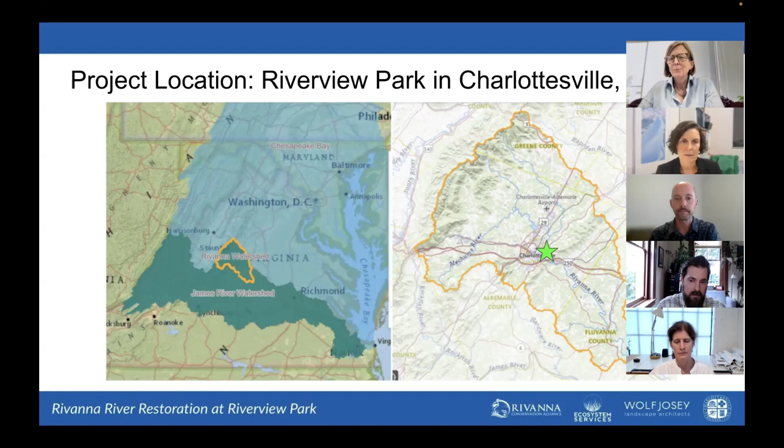So this project really got its start with a conversation that Kip Mumaw and I had many years ago, back in 2019, standing in Darden Towe Park. We were looking across the river at this area that was covered in riprap. What had happened is that the riverbank had eroded significantly and exposed the sewer line that runs through there. The sewer line also runs through Riverview Park. We were trying to figure out how to get ahead of issues like this so we don't end up having a riverbank that's completely covered in riprap, which is not what anybody wants, I don't think.

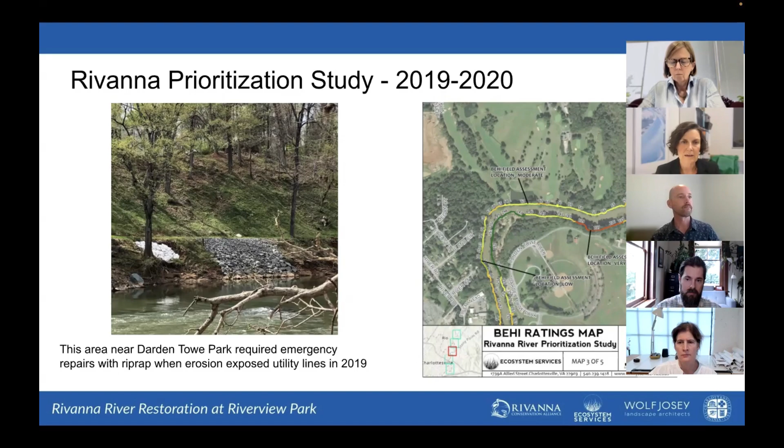So we were able to obtain a small planning grant from the National Fish and Wildlife Foundation to predict erosion rates in a 5-mile section of the Rivanna River running along Charlottesville, and use that information and other data to prioritize places where riverbank restoration was needed and feasible. Coming out of that project, we selected a location where we wanted to pursue a project.

So we selected Riverview Park, and we selected it for quite a few reasons. Primarily because it will generate so many important benefits for our environment and our community, and also has the likelihood—and we've seen this come true—of bringing together a lot of partners and funders who are really interested in making this project happen.

So the main benefits coming out of this project—we'll go into all of these more later in the presentation—but in a nutshell, the project will be protecting the land, trees, and trails in the park from erosion. We're seeing all of those things falling away, washing away every time we have a big storm. Riverview Park isn't a huge place, so we can't afford to lose it, and we don't want to be in a situation where that erosion continues unchecked into the future.

The project will reduce a lot of water pollution, and Dan will go over some numbers with you. It will improve a lot of opportunities for recreation—boating, wading, observing wildlife. I saw in the poll that was one of the things people said they like to do the most, is come to see nature in the park. And it will enhance habitat for the other creatures that like to use the park and live in the river and need a high quality environment.

The project will also protect public safety. Right now, the banks are very steep and dangerous for people. And it'll protect existing infrastructure. Like I mentioned, the main sewer line for the city runs down along the river through the park here, and we don't want it to be exposed through erosion.

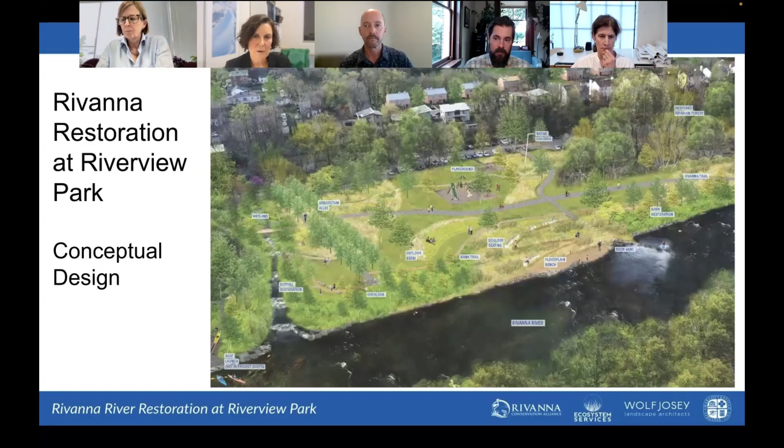Last, I'll talk about project funding. Since we submitted our first grant proposal to start implementation a few years back, the cost of the project has escalated due to inflation and rising construction costs, not because of anything we're doing with the project. Right now we estimate the total cost for everything, design, permitting, and construction, to be around $1.4 million. We obtained a large implementation grant from the National Fish and Wildlife Foundation again to get us started, and the city has also contributed funding from the Stormwater Utility Fund, which is, I think, $250,000, a large amount of money.

The Office of Sustainability and the Department of Parks and Rec are also contributing. We have a nice large grant from the Virginia Stormwater Local Assistance Fund and from the Anne and Jean Worrell Foundation. We also have funding from Rivanna Water and Sewer Authority, some from the Rivanna Trails Foundation, and RCA. So we have a nice collection of funders working to make this project happen.

And now I think I'll kick it off to Dan to talk about water resources.

Thanks, Lisa. Before I jump into my presentation, I want to take a minute to say how thankful I am to be working with RCA on this project. We've been partnering on projects for over 20 years now and had the chance to work on a lot of impactful projects together, but I think this one is really the most exciting and significant yet. It simply wouldn't be happening without the countless hours of hard work that Lisa and the staff at RCA have put in, and the resources they're bringing to this project. So on behalf of the city and really the entire community, thank you, RCA, for helping us make this project happen.

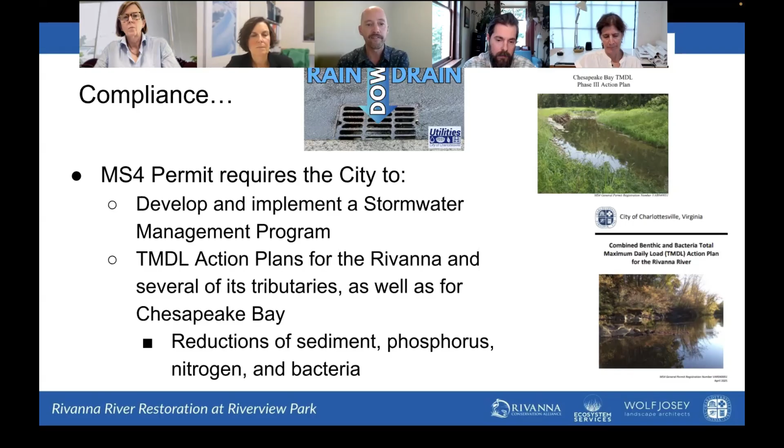The permit also calls for the development of action plans for these impaired waters, specifying ways in which we are going to reduce pollution in those streams and hopefully restore them to a healthy state. We have action plans for all of those waterways I mentioned, as well as for the Chesapeake Bay, since Charlottesville falls within the Chesapeake Bay watershed. Specifically, we're talking about reductions of the pollutants sediment, phosphorus, nitrogen, and bacteria.

These projects all have quantifiable pollutant reductions associated with them. And that brings us to this project, the Rivanna Restoration at Riverview Park, which will continue to provide us some of those pollutant reductions we need in order to meet our MS4 permit requirements. So I just wanted to give a little bit of a feel for what our requirements are and the impact this project will make towards meeting them.

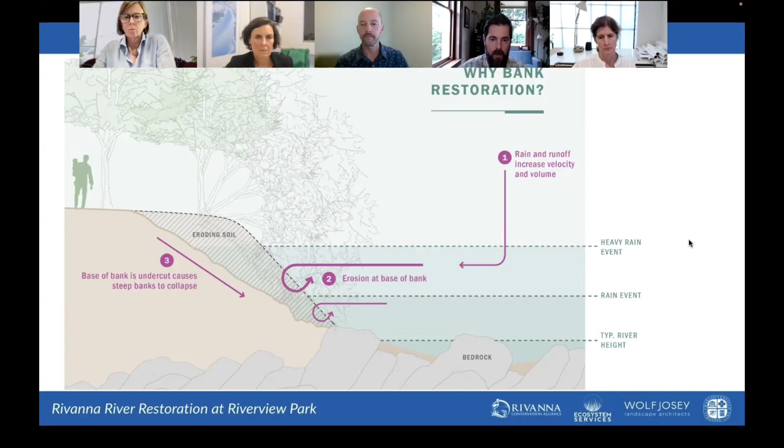We're seeing this process take place even over the period of assessment. So we want to look at what is creating the situation and how we might be able to intervene in a way that accomplishes the goals of the project. You can go ahead to the next slide. And of course, we need to look at the riverscape in its context.

I like this quote from Ellen Wohl — she's a researcher out of Colorado State University. The quote is, 'Rivers exist in a rich and complicated context that reflects fluxes of matter and energy between the river and the greater environment, as well as the history of these fluxes.'

I like this because it really speaks to the need to look at not just the specific stream or river bank, but we need to look at the watershed, and then we also need to look at the history of the watershed and how things have changed over time. Go to the next slide.

Pre-1937, we would have expected to see a lot of agriculture and forestry activity, logging activity in the watershed. And that can have impacts downstream.

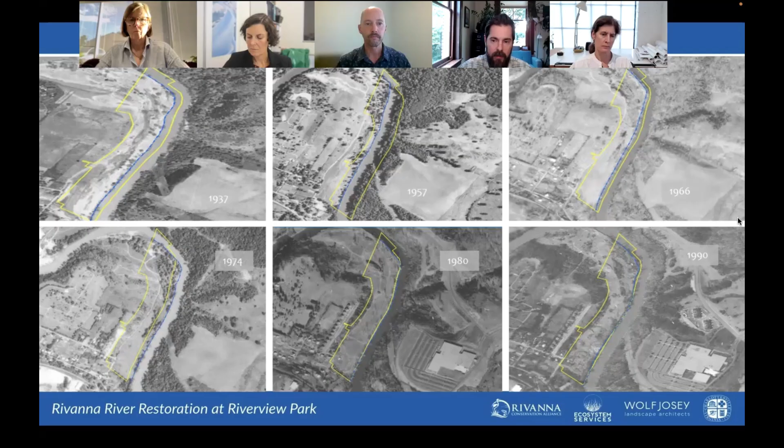Go to the next slide. What we're trying to do is look at what sort of changes, how is the river adjusting to these watershed changes and the changes within the corridor.

We see this - it's not consistent. This is representative, but there are areas that erode more, and areas that erode less through this corridor. We can go to the next slide.

The downstream portion of Riverview Park, some of you may have seen a stormwater outfall. We wanted to look at that too, because we see that it is eroding considerably. You can see in 2017, it was more of a swale.

This is looking - say we're standing in the river looking upstream at the outfall. You can see that it's dropped in elevation almost 10 feet between 2017 and 2022. That is a considerable amount of sediment and associated pollutants washing downstream.

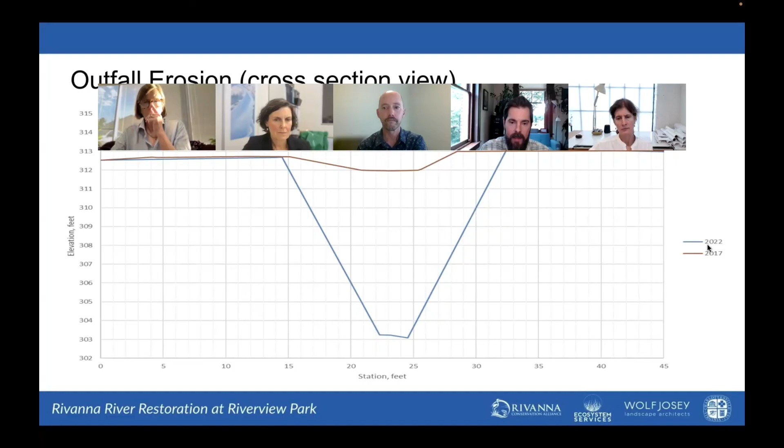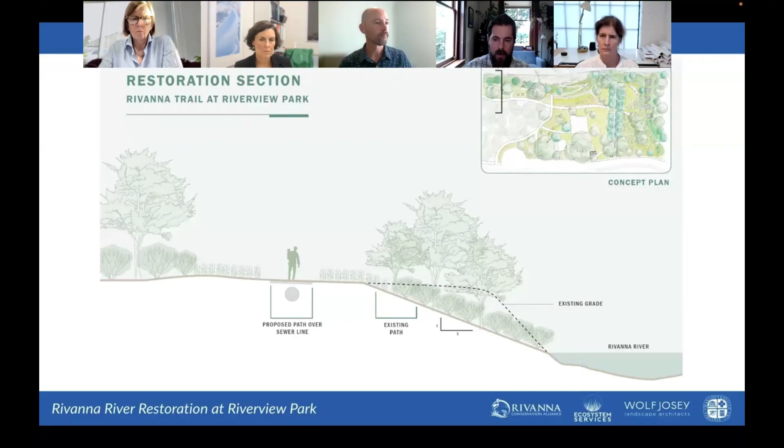Here again is a cross section. What we're seeing is the river is widening and that slope is unstable. So what we want to do is anticipate that by removing soil, establishing a stable bank, and then planting it with vegetation to protect that stream bank. We're removing some of that material you can see here, and then planting it along with providing reinforced toe protection - larger boulders placed at the toe to help prevent that erosion from taking place.

Not only are we trying to provide a stable bank through vegetative practices and a more stable bank angle, but we're also looking at putting these in-stream structures. These structures help deflect water away from the bank. Sometimes they're called river training structures, and this will help protect the bank as it starts to mature and vegetation starts to mature.

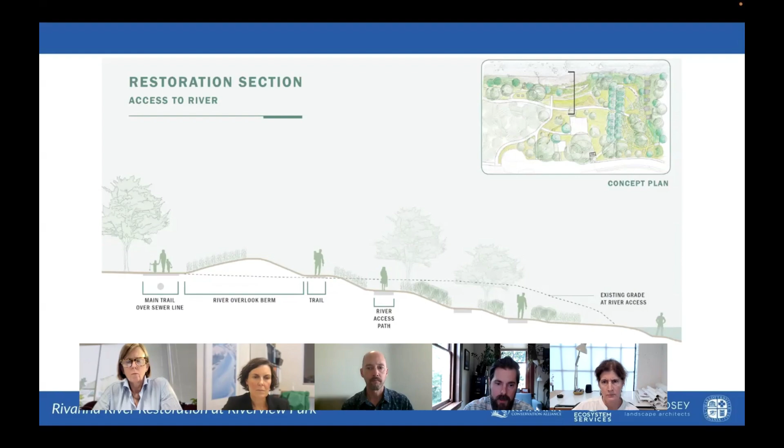This is one of those access points that Lisa was mentioning, in addition to an upstream and downstream access point. Here we're providing a bit more flood relief during smaller events, and that will also help the river from an energy standpoint, and provides a more accessible route to get close to the river and enjoy it.

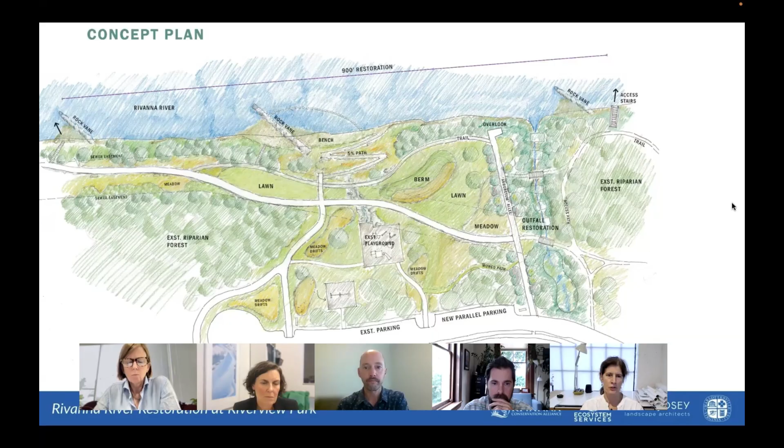This is an aerial of the site - you can see the playground and the river for reference. One of the key driving forces of where we relocated the main path along the river was to align with the existing sewer line, working within a 50-foot easement around it. Since this area has to remain clear for maintenance, it's a good strategy for relocating the path.

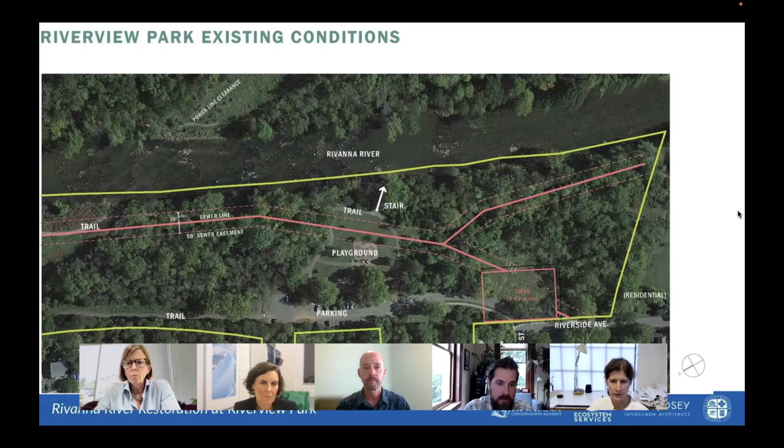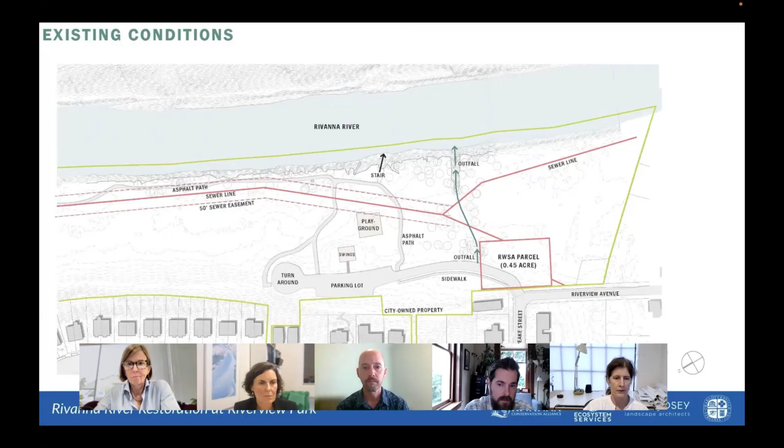If you go to the next slide, you can see the sewer line here relative to the existing paths and riverfront - it really skirts the edge of the existing path.

The new trail, shown in dark gray, meanders through the sewer easement. There are paths extending off the main path, shown in brown, which are either mown trails or silt paths or walkways maintaining a natural pathway experience, similar to what exists now at the park.

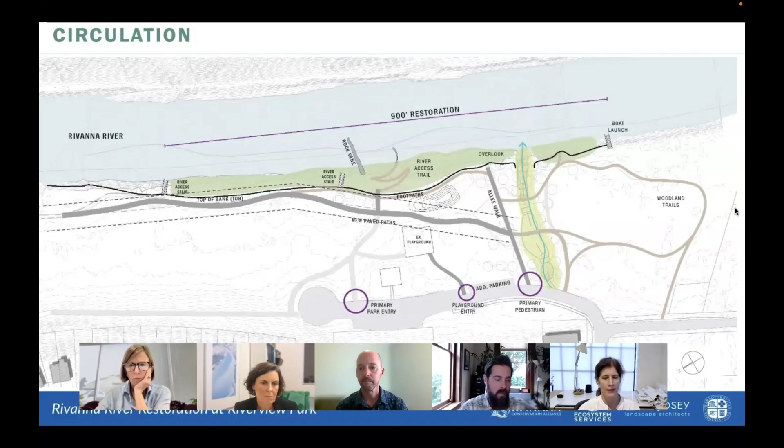There are 2 access stairs down. I can show you this if you back up. Here we are.

This diagram shows some of the main activity zones. The purple squares along the river show access steps down. The two on the left side are steps down to a beach area. Further north is one right at the power line cut. To the south there'll be a wood stair and new boat launch access. At the main entrance, the path will take you to the river walk or to an overlook area overlooking the river. The existing north entrance will lead you directly to a gentle path down to the river for swimming and recreation, as well as a set of stairs there.

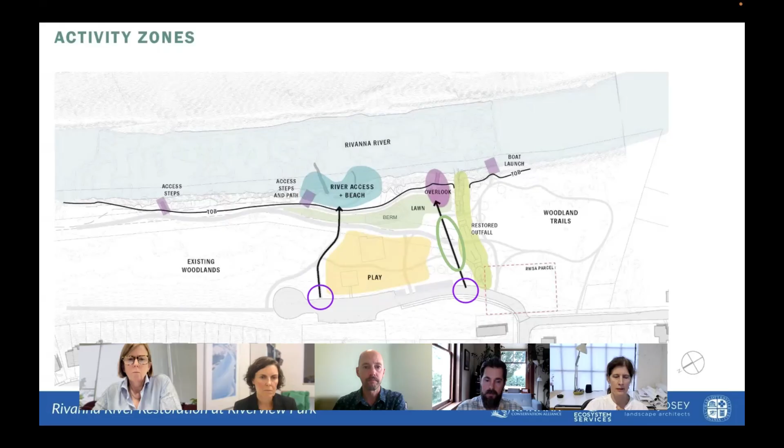Let's talk a little bit about the planting. In the main area of the park entrances, shown in light green, it's still going to be sort of an open lawn and tree area.

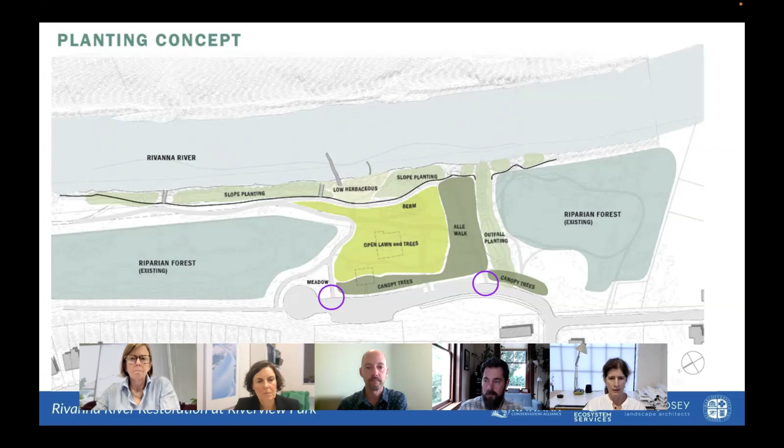And then we'll also be planting, 257 shrubs plus 161 along the river banks. So again, a variety of native species that are pretty common along the river banks.

There'll also be a lot of plug native understory ground cover, plug planting, and seeding. So we really are doing everything we can to reestablish trees, shrubs, and ground cover along the areas that are disturbed.

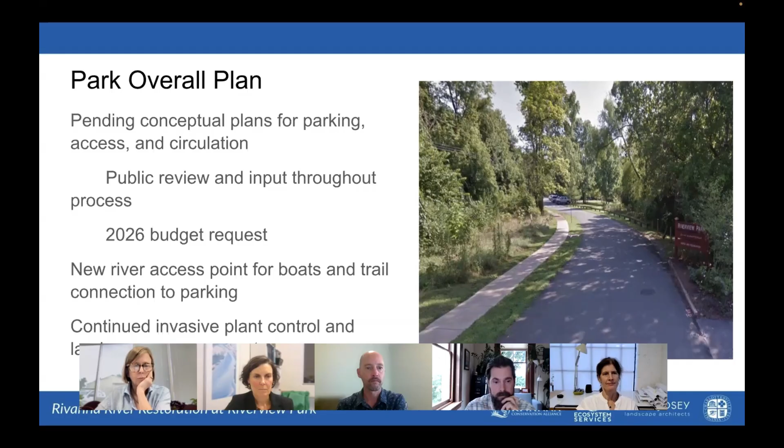There was one other thing I was going to mention, but it's not coming to mind. I am available to discuss things related to park planning separate from the project happening here on the river, which we're very excited to do.

All right, I think this is back to me. Just to wrap up, thanks to everyone for sharing that information about the project. We'll move into questions next, but I wanted to provide a little information about our expected timeline to get the project actually constructed.

We are still in the process of obtaining the final permits needed to move forward. That will wrap up over the next couple of months. Later this year, we'll put out a solicitation for the construction contractor, which will run through the city's procurement process. Construction is planned for late winter into spring 2026.

So our goal is to have this all wrapped up in time for the community to be back at the river in the summer next year.

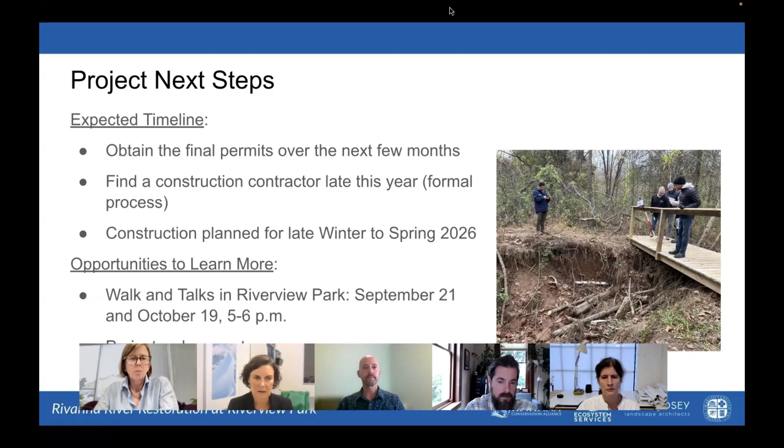We're going to answer lots of questions coming up, but if you'd like to learn more in person, we have two more walk and talk events in the park, on Sunday evenings. One is September 21st, focused on trails, and one on October 19th, both from 5 to 6 p.m. We just meet at the kiosk down by the river.

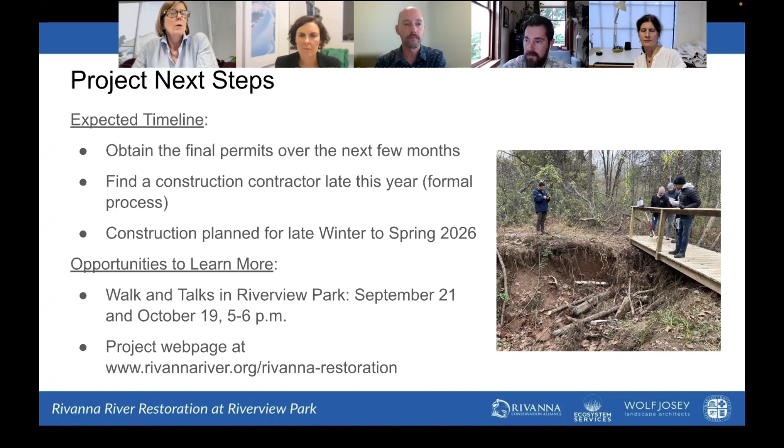Other questions? Okay, I'm going to stop sharing my screen, because I think it'll make it easier to see everyone's questions.

Will there be a pedestrian bridge?

I was a participant in a project through the Thomas Jefferson Planning District Commission, which I used to work at, to site a pedestrian bridge across the Rivanna, if that's the question. At that time, the conclusion was to put it over at the end of Market Street near the woolen mills, not directly into Riverview Park, because that would have required a lot of fill. There was a community discussion, and they landed on a concept, then did some preliminary design engineering to get a cost estimate, which was quite high—I think more than 10 million. They have not yet applied to take that to the next step and attempt to fund actual construction. So there is a reasonably well thought out, publicly vetted plan for a bridge over the river, but it's kind of in the hopper—I don't believe it's been submitted for any known funding source to get started.